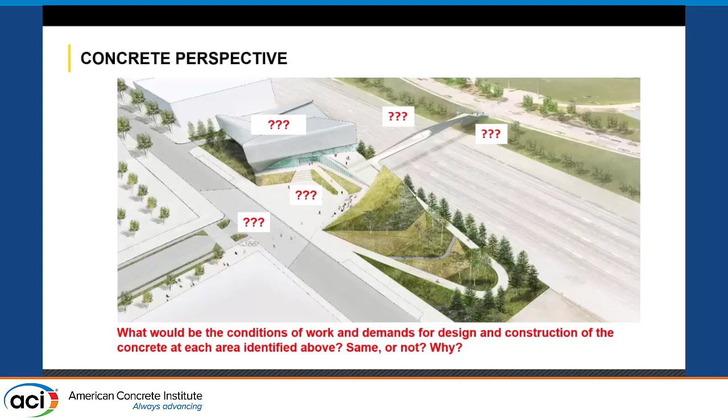That's extremely important for North America, because even in the USA we have 50 different ways at least to do something, since we have 50 states. And if you go through Mexico, USA, and Canada, there are different ways of doing concrete in each. That happens with standards too.

But what we commonly have is a challenge with specifications. What's the main challenge? People want to prescribe things because based on their experience, they believe certain requirements are needed, and they try to force the user to follow those requirements, because that's their belief, that's what the engineer believes needs to be done to achieve quality concrete.

But there's also another approach, looking more at performance. It's not about what I think needs to be done, but what are the conditions of work that person needs to understand to make the right selection of materials for that location. If you think about it, everybody agrees those are the two types of approaches you have around, right?

You can see, and you're going to see in a minute, that in the USA we take a look at different things than Mexico does. We took a look at things very different in Mexico and USA, and you also expect that.

One example I have here, I believe is very interesting, and I call it clear goals and undefined requirements. If you read it, everybody will understand those are very clear goals. We want that, right? But think about putting that in a spec. What are you going to do with that spec? Nothing, because you don't have a way to measure it.

There's no metrics. What is low permeability? What is low permeability to me is different than what is low permeability to you. What is dimensional stability and freedom from cracking? Is that a certain shrinkage value, or is that cracking? Because you're going to get cracking for many different reasons. So it's important to have clear goals but defined requirements.

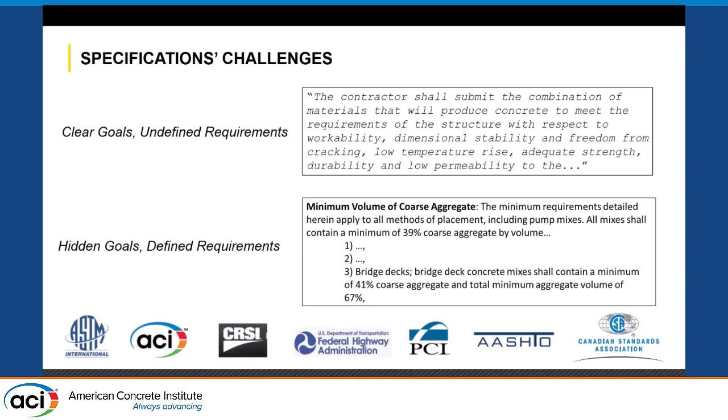Performance is all about what you need to do to build the work, and obviously make a performing service.

So the other fundamental part I want to mention is, what about smart requirements? You may be wondering where you saw that before in ACI, or where you learned this in engineering college. Well, you never learn this in engineering college when we were talking about science and engineering. But if you've been through corporate trainings on developing goals, the SMART approach to setting goals is a very important fundamental. Why? Because it's specific, measurable, achievable, relevant, and time-bound.

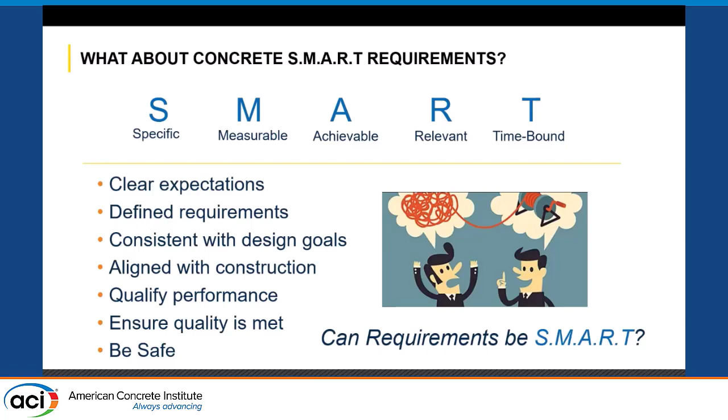That means there's a performance criteria you're going to meet, that you're able to measure, and able to start and finish. So the question is, why aren't our specs smart? If you want to be constructible and high quality, you need a spec that is specific, that you can measure, that can be achieved, that is relevant to the performance of the work, and that you're able to complete within a certain time. Pretty simple — a very easy concept to understand.

So then let's go to the technical side of things. We need to make sure concrete is strong, durable, workable, and economical.

My approach to economical is very different from what many people think economical means. It's not having a low unit price for your concrete — that's not what economics means. Because you can have a lower cost concrete that actually takes a lot of time to build and costs a lot of money to the contractor to get done, because it's not a good mix.

Now you can have a slightly more expensive concrete material that's actually easy to build, performs well, is constructible, achieves all the properties you want, and you don't have to revisit it again. So cost relates also to performance in construction, performance in design, and obviously there's a unit-price-related cost too.

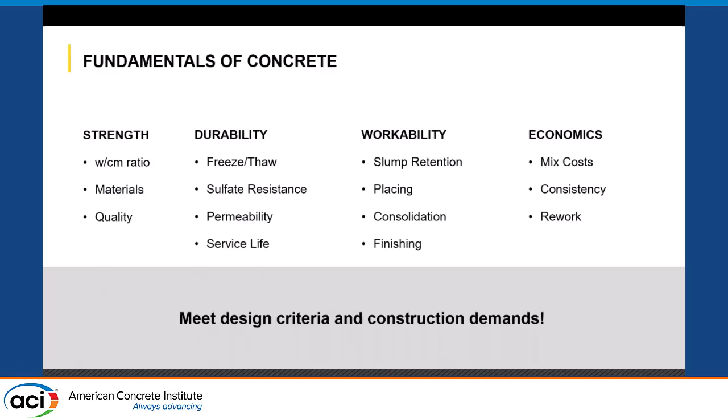Now let's start talking about North America. I started using snapshots of different standards to compare. I'm going to use the main concepts - everybody knows what slump is, like it or not. There are different reasons why we still do it, but there's not much technical rationale. Still, everybody finds it easy to understand, so I'm going to start with the slump.

Sorry, I'm going to start with mix design proportions instead. In ACI 301, it says concrete mixture proportion and characteristics indicate the proposed ranges of mixture proportion and changes in the materials. In the United States, we are required to provide mix design proportions - the actual formulation of your mixes is a requirement for construction, something very commonly done. But what I'm showing here is that in Mexico and Canada, that's not the case.

You start asking why, right? Think about how we do things, how much we love to prescribe things in the specifications, but the concrete producer is responsible for that formulation. The concrete producer is supposed to work with the contractor to find a mix that actually works for their own project. But still, you want to check it and make sure - if the mix has a little more water that you don't like, you need to tell that concrete producer.

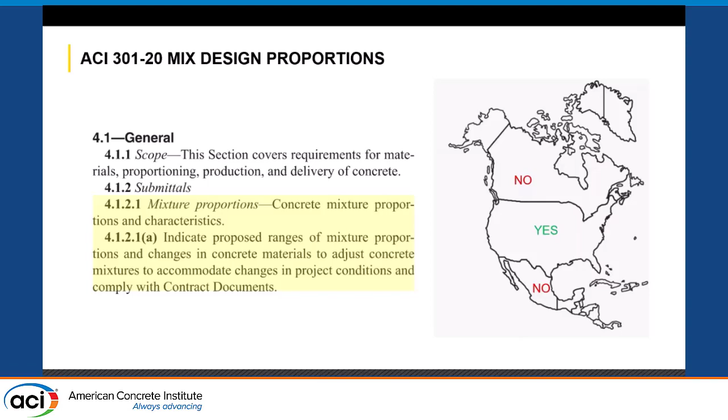Now we're going to talk about the slump. A similar conversation goes with the slump - what is a slump, why do you need slump, what does slump mean to the design performance in service? I'm showing you here some things to start thinking about, because if you think that 4-inch slump is the best concrete you can get, as many people think, I'm going to show you how that works for that type of rebar I have there.

It's easy to do research and talk about bridges in simple communities and municipal areas that don't have a lot of rebar, but think about rebar congestion - how are you going to build it right, consolidate it, have good quality, and avoid cracking with 4-inch slump? That's a problem we have in the industry in the United States. Sometimes the research isn't relevant to the standards, but we adopt it in the standards and keep moving, believing we have the right performance. That can be problematic.

So I show you here different levels of slump. All of them are good quality concrete, all of them have good durability. I'm going to ask you a question: which one do you think has higher strength or better durability in these three photos? I believe we have a lot of experts here, so I believe by looking at slump, you know which one is the right one.

He could be saying, what do you guys think? The SCC, he's saying - he's selling admixtures, so I cannot say anything there, you know what I mean? What do you think? Anybody else? Which one is better - better strength, better durability?

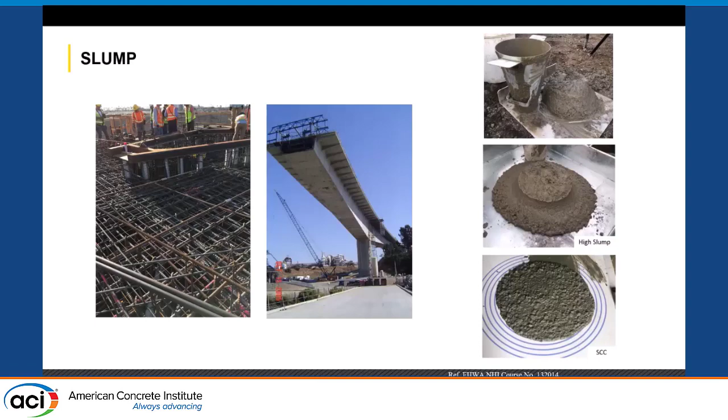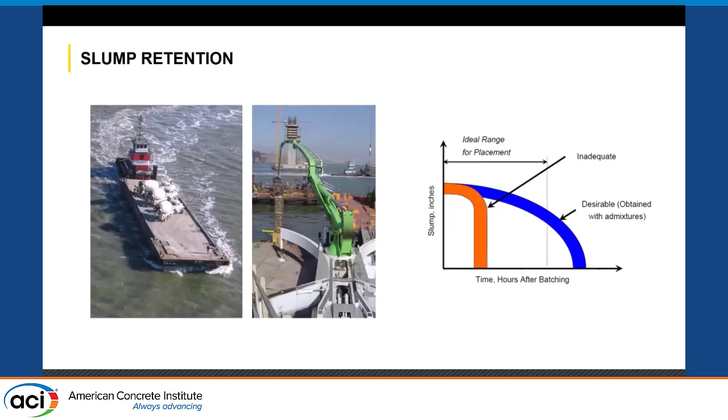So the other part about construction is, we keep talking about slump, but what does that mean? We have an operation that requires a certain slump retention. It's also about how you're going to build the work. You need a slump to construct it, but you also need to target a certain slump retention to build it, because construction demands vary. It's important to understand that.

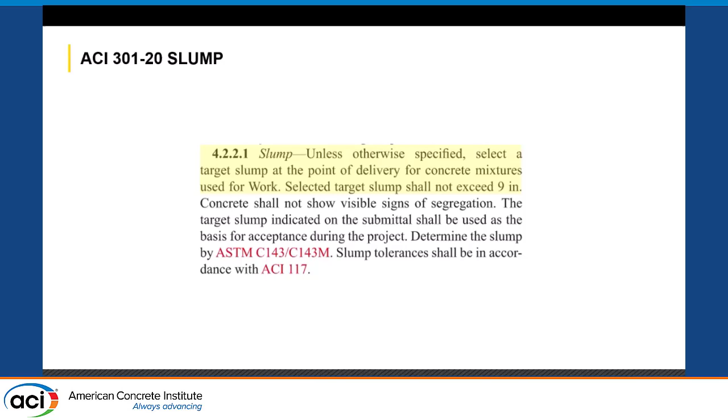So we got to the comparison of the standards. ACI 301 has modified their approach - they now state that target slump at the point of delivery needs to be specified, and the target slump shall not be greater than 9 inches. There's also another section for slump flow, so they allow that as well.

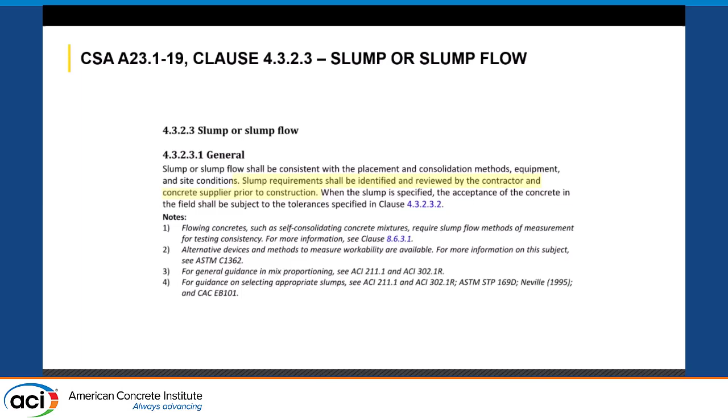In Canada, they state that slump requirements shall be identified and reviewed by the contractor and concrete supplier prior to construction. In Canada, the culture has the belief and trust that different parties have responsibilities to meet. If the concrete producer and contractor decide on a certain slump, they go with that slump - there's a culture built on that thought.

In Mexico, the standard talks about targeting a certain slump for purposes of water content, but after that you pretty much have admixtures to develop the target slump - similar to Canada, where the concrete producer and contractor have the freedom to establish a slump. However, in the U.S., we like to put a limit on everything - 4-inch or 6-inch, it doesn't matter what you're going to do, you need to deal with it. It's a challenge we need to work on.

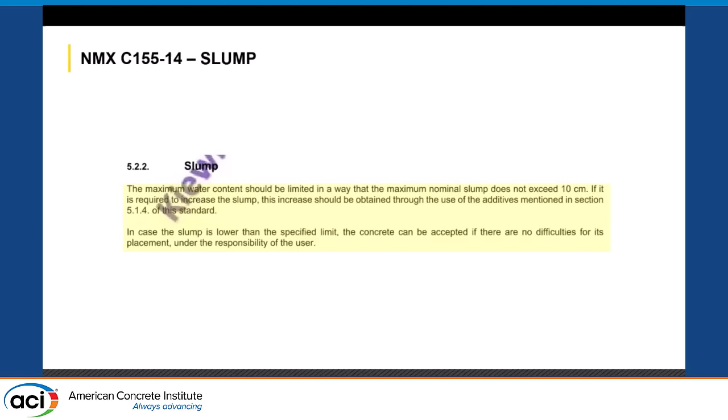Mass concrete - I'm going to talk about this because it's another topic where we have a lot of different opinions in ACI and CSA. Although the concepts are recognized in ACI, in CSA we've been able to move faster to adopt them and integrate better knowledge with practice.

It's important to recognize mass concrete - traditional mass concrete, think of it more like hydro dams, big work that doesn't have a lot of reinforcement and uses larger rocks. When you think about thermally controlled concrete, it's more the structural, isolated, large placements that occur in bridges or buildings.

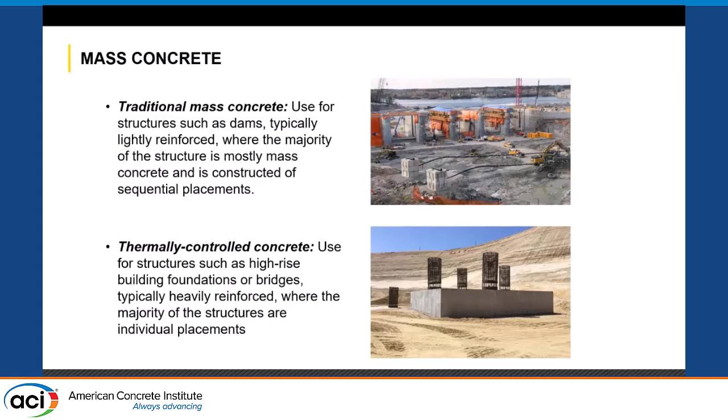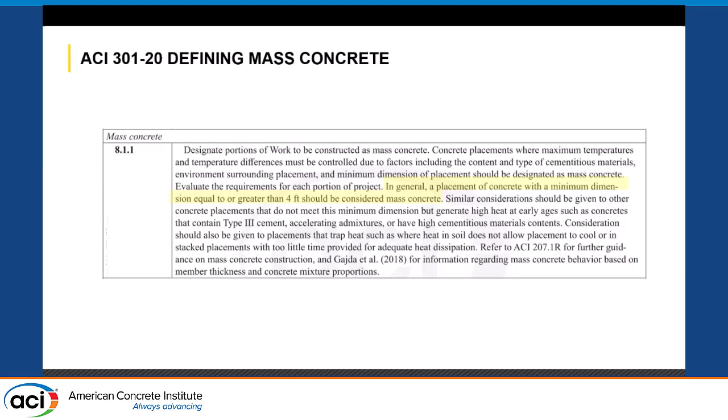For defining mass concrete, in ACI we recognize, in a non-mandatory section, that about 4 feet or greater you start getting into mass concrete. In CSA, it's about 1 meter, which is 3.28 feet. So between 3.28 and 4 feet, they're saying about the same numbers.

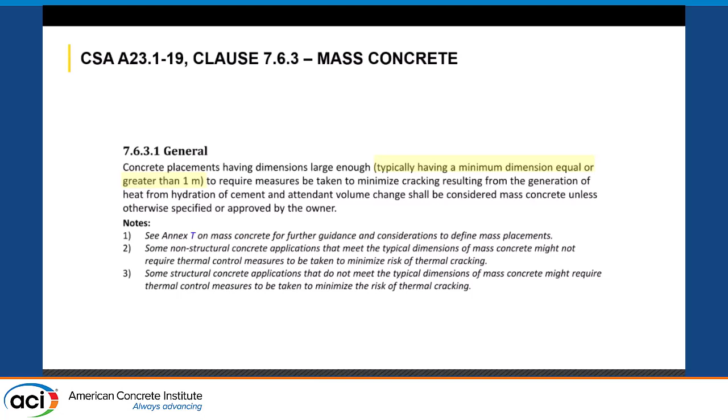Now in ACI we also have guidance for defining mass concrete which relates the type of mix to the size of the element - it's a correlation of how much heat we expect can be generated in a certain placement based on the amount of heat from the cementitious materials relative to the size of the section. So you're likely to be around the same target, 3 to 4 feet, which is in between Canada and the US for where you start to define mass concrete. It's not an easy number to define, but certainly somewhere there.

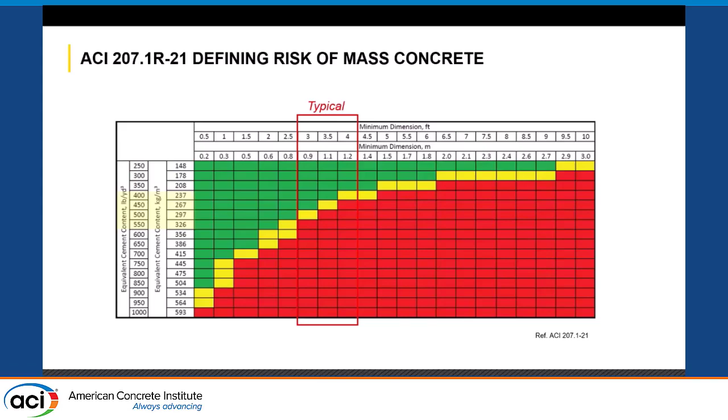And what we've been doing - we actually had a meeting about this today - in ACI we're not planning to change the temperature limits. We've been going over the last two cycles in ACI discussing the concepts we implemented in CSA in Canada.

We have decided to not make a change on that. We continue to have 160 and 35 degree differential, so 160 in this case is the maximum temperature.

However, it's recognizing the approach that we took in Canada, which is using supplementary cementitious materials to optimize the temperature profiles you can get and make sure you manage thermal controls. In CSA, we have a different approach, which actually recognizes what we already have in ACI as a guidance, but now we recognize it as part of the standard.

We're pretty much saying, if you don't have any mitigation with supplementary cementitious materials, you do not exceed 70 degrees. However, if you have an improved system with cementitious materials at certain levels, as you increase them through different levels, you get an allowance of 75 degrees up to 85 degrees.

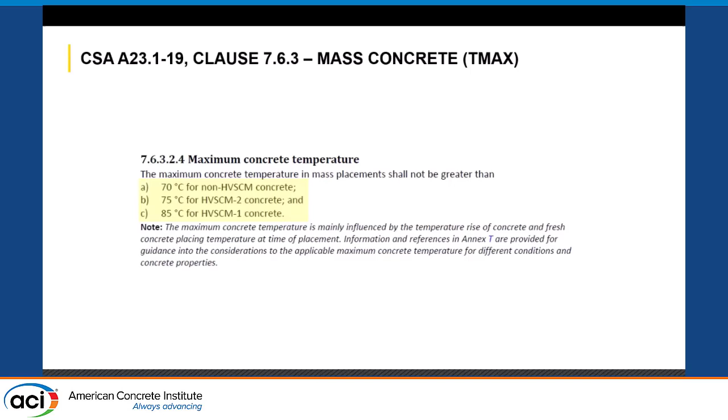So pretty much you can actually have a determination of performance. What is the type of application you have? What is the size of the element? You may have a large size element that needs more powder, and you can tolerate more heat because you improve the chemistry of that cementitious combination.

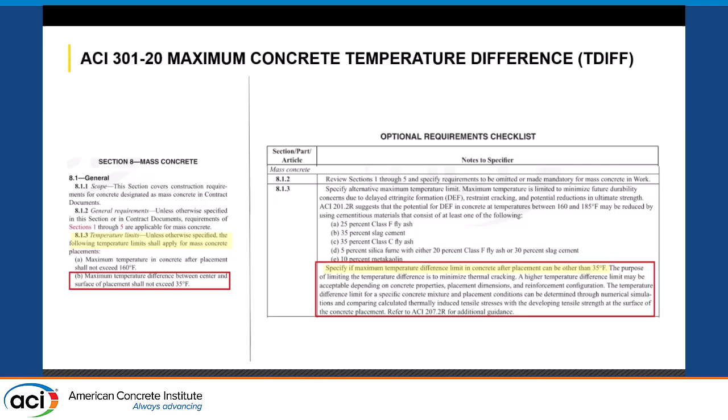Then you have the same concept for differential. 35 is a fixed limit. We have it in the US, in ACI. We also recognize in the paragraph below that you can use a design approach to calibrate a performance-based temperature differential. However, when you go to Canada, we already adopted the concepts of performance, and they're part of the standard.

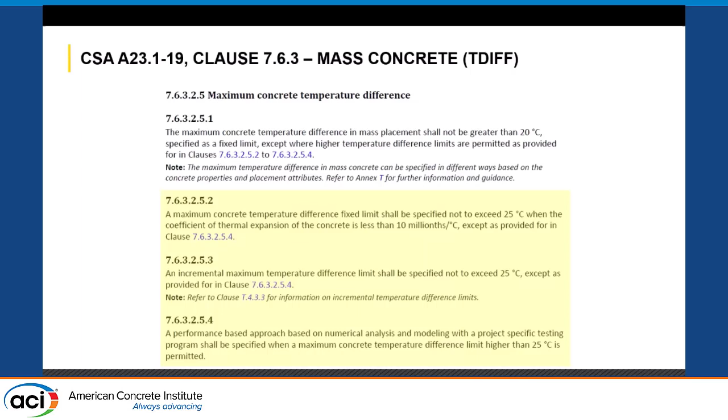So on top you have the differential of 20 degrees Celsius, which is 35 degrees Fahrenheit, and those are established in ACI as the default standard. However, we directly now recognize in Canada that you have different ways of doing this. By recognizing the development of concrete properties and qualifying them, you can actually have higher temperature differential.

How does that look? When you look at the fixed limit, that's a concept from traditional standards. Traditional 35 degree, even if you go to higher temperature limits, it's just fixed. It doesn't recognize performance, it doesn't recognize that concrete gets better with time, that your strength is going to be better at 7 days, 14 days, and 28 days. By looking at performance, you can create an approach that recognizes the ability of the concrete to improve, and that's what you're doing with the concepts implementing performance.

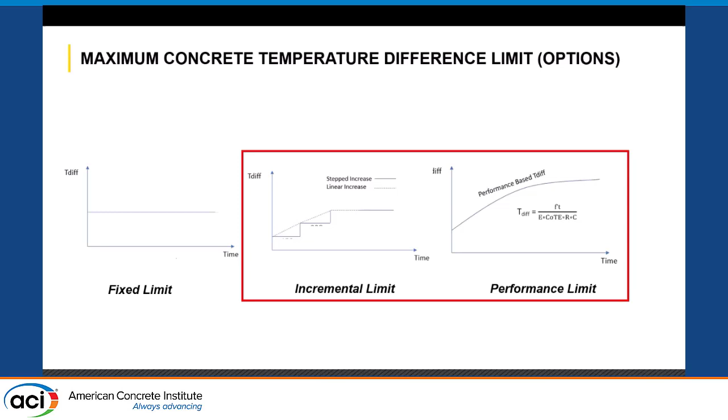These are qualified, calibrated with analysis and testing, and you're able to determine something like this. If you look at an example, directly compared to an ACI limit of 35 degrees, you can see where it is in this case. You see the opportunity we're losing and the inefficiencies we have in construction by just limiting a number, because all of a sudden you look at the 35, and it doesn't change with time.

But then look at the curve on top, and that's the mix. You have a mix with a very good tolerance to tensile strains from heat, from the differential of heat gain and loss of heat. So you get thermal strain occurring, but the mix is actually generating enough tensile strength to tolerate those tensile strains. So you're increasing the capacity of that mix with time, and now you can tolerate a higher temperature differential as the concrete gets stronger.

What happens with that? You can build concrete faster, you can be more efficient, you can avoid a lot of the cooling that occurs which actually takes a lot of energy too, and be able to produce a high quality product without having to be constrained by prescriptive numbers. Because these are prescriptive numbers, they don't even have a technical basis for it.

So that's the concept we implemented in Canada. As you can see, a very good opportunity for improving performance of work. In Canada we do it. In USA we talk about it. We don't want to make a decision about it. We are afraid of it. Don't know why, but we continue to be afraid of understanding concrete.

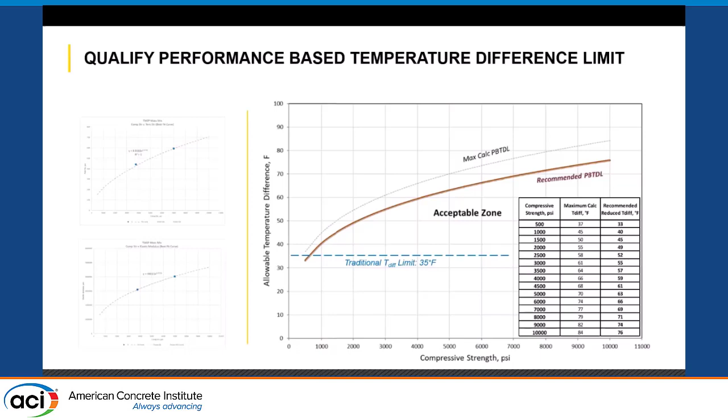And then the next one is durability. So when we talk about durability, durability is actually important for concrete. You can imagine that there's nothing better than to make concrete sustainable, to be durable.

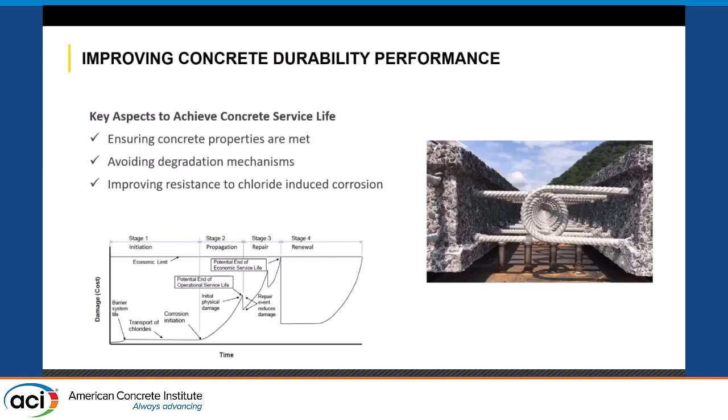And I always say, what is the most important part of concrete to be durable? It needs to be workable. Because if you cannot place it, finish it, and consolidate it, then you cannot do anything in the field. It can be good in the lab, but you cannot do it in the field, right? So meeting the concrete properties is important, avoiding degradation mechanisms, and improving resistance to corrosion.

Okay, so let's talk a little bit about that. What are the concepts that we typically have available? Think about a concept we have available to make those decisions. You can provide better cover, you can provide better concrete, you can improve the rebar, and you can limit the ability of anything to get into that concrete, with coatings, surface treatments.

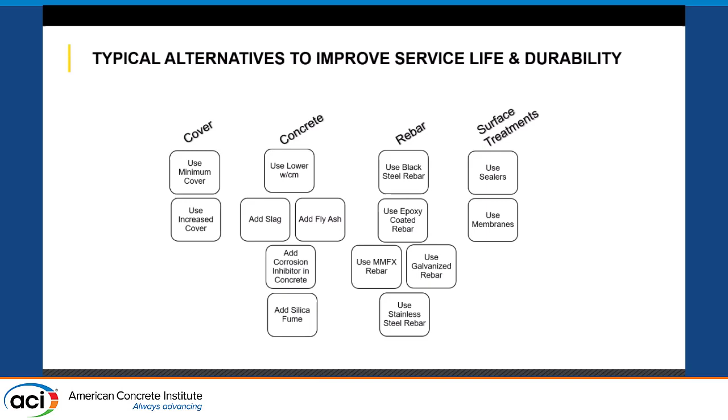If you look at the first part, cover, it's well addressed in pretty much every code, every requirement. You need to have a certain cover. And then you have water-cement ratio. All the other parts that you see there, if you look at ACI codes, it's not addressed. All you say is that to be in C2, which I'm going to show in a minute, when you're in C2, you need to have a maximum water-cement ratio and a minimum strength. And all of a sudden, that's it.

That's the solution to make concrete durable. Do you see anything else there? Do you see any performance criteria testing? Do you see any correlation of performance with materials that can improve that material property of durability? There's nothing. This is the current ACI 318 standard requirements. Nothing. So if somebody tells you ever that you have good quality concrete in the bridge because they meet the code, good luck. Get out of that bridge.

Honestly. But now look at how Canada and Mexico are doing things different. These are our neighbors, right? So North America, our neighbors. So the first thing, and I'm not going to get too much in the details because I know Doug is going to get into all the details, but we have all these different classifications of exposures.

And I'm going to focus on just these two. When you see those two, and you want to think about what C2 was in 318, but put a little bit more levels of effort and requirements to understand performance. Well, that's what Canada did. Canada pretty much took these minimum requirements and just used a performance criteria to supplement the ability to have better durability and performance in service.

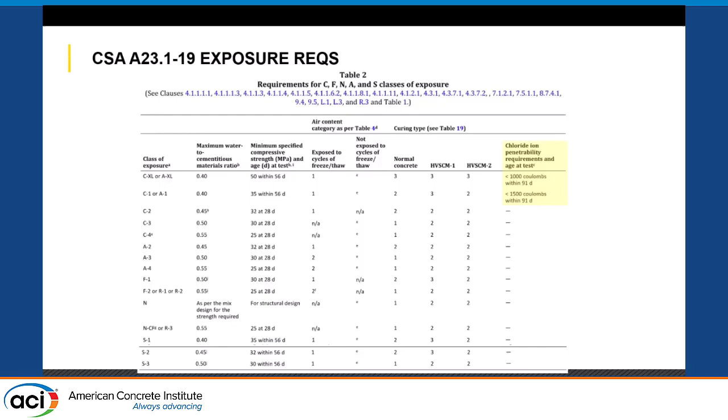Now we have also in Mexico different series of requirements, and these are just a classification of exposures. We have 3 pages of classification of exposures in Mexico. And I know everybody has seen the 318 in Spanish and 318 in English. It's always longer in Spanish. I guarantee you that. I cannot guarantee you what's going to happen, but the 318 in Spanish is always going to be longer.

And that's why I don't write anything else in Spanish. I do it in English. Don't ask me to write in Spanish. It's going to be a long report. But anyhow, this is in English, but it's just the culture. We like to explain things. We have a lot of passion and energy, but we like to explain things. We like to say things 3 times to see which one you laugh. And you laugh at one, that's good, he got it. The other 2, he didn't get them.

But anyway, the point here is look at this. I love this table, by the way. And we're doing a lot of work in Mexico, and I'm glad that they're doing what they're doing. It's a very well thought table. They got from erosion resistant to sulfate resistant to all other durability mechanisms. And you see that yellow line that I have there? There's a permeability criteria associated to these environments that are for severe exposures.

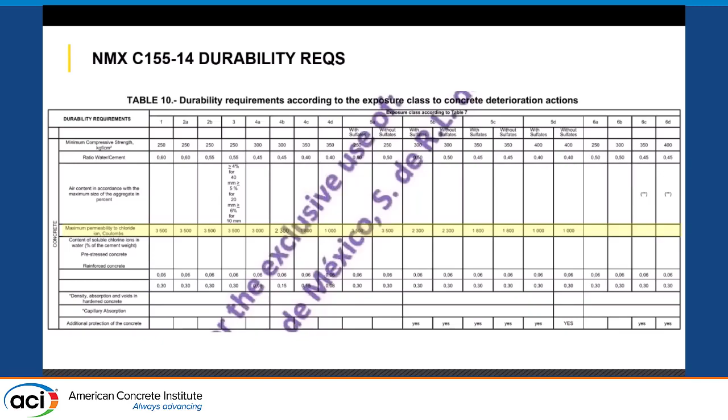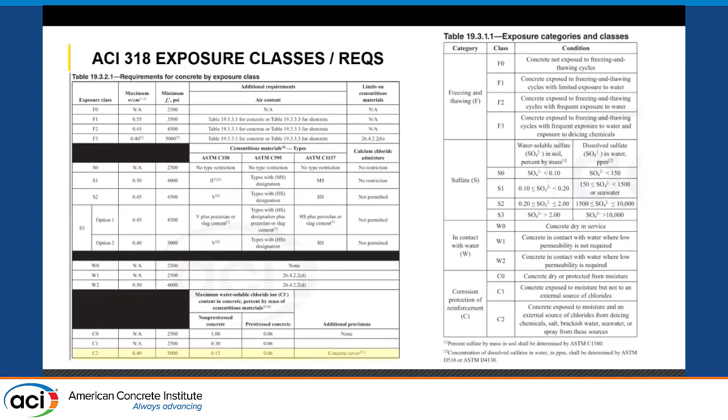We go back, guys, we go back. We go back to 318. We look at what we got here. It's a bare minimum. We just say with water-cement ratio, we make the world better. But Canada and Mexico are doing performance testing for this. So this is extremely important lesson learned here. We need to start thinking a little bit more about durability and performance. We're working on a code.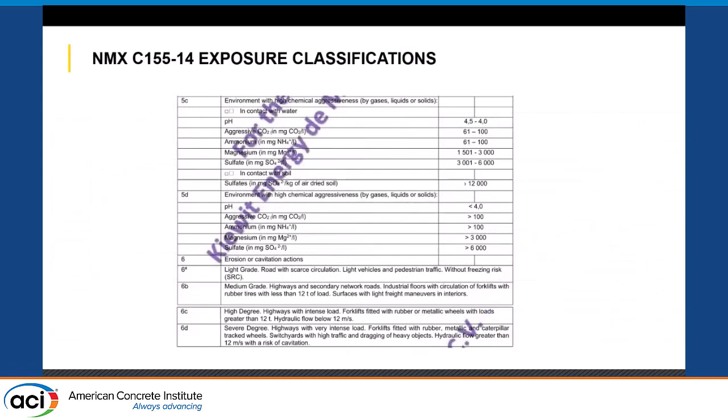All that is going on the works. But as you start thinking about why we're doing all the efforts we're doing with developing codes and developing standards, this is extremely important for the U.S. So then I'm closing here. I have a couple more slides closing. But this is something extremely important.

These are projects that we have done, and this is more of a mindset. I started with the perspective of concrete, this mindset. This is the first project I'm showing here. There's two projects actually: the Inglewood Stadium, and the bottom one is Fast Fix 8. Those are accelerated fast track projects we did. Extremely successful projects, and these two are emergency projects.

Everybody remember Katrina, the fatal event in the United States? We reconstructed all the levees and all the emergency structures for New Orleans. And then we also did the emergency project on the spillway at Oroville Dam. When the dam collapsed and the spillway collapsed, we went there and did the work.

I'm going to tell you there's one trait, just one, that is common in those four projects: commitment to excellence. Because there's no chance for failure.

We don't have years to build something. We don't have the ability to take a 4-week review process. Everybody from the design, the owner, the contractor, the producers had one goal: you need to get it done, I need to get it right.

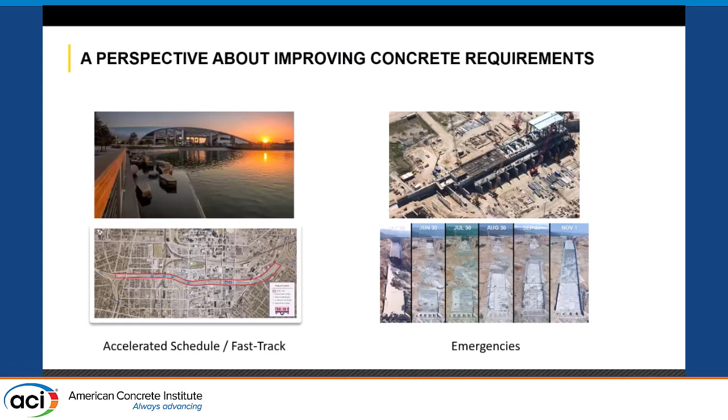But when we are not on an accelerated schedule, when we're not in an emergency, all of a sudden we become dumb and lazy. But if we put our thoughts into it and work on commitment to excellence, like we do when we're under pressure, all of a sudden we are amazing. So when you look at the problems we have in the industry for standardization, it's not ACI, it's not the US, it's not Mexico - it's us as people that are not willing to actually commit to achieving excellence.

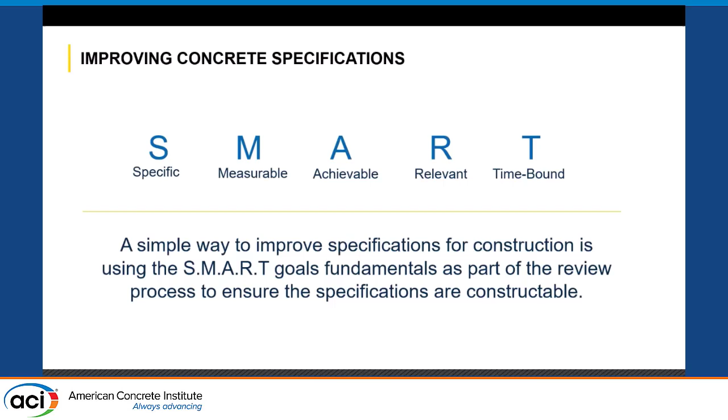Basic things like SMART - we all learn these in management, we all learn these in the basics of setting a goal. We go to develop a spec, we don't know where to start. This is all basic stuff: specific, measurable, achievable, relevant, time-bound. That's going to get you to be constructible and be high quality.

And then pretty much, just to sum it up, we need to have requirements that are technically sound, relevant to work, specific, aligned with demands of the work, achievable, executable, performance-driven, because we need to make sure we perform, and flexible to fit different purposes - there's no one-size-fits-all.

So because the left side here has a solution and the right side has a different solution, doesn't mean one is right or wrong - just different solutions. Hopefully you understand the goal of my presentation today: we're sharing the approach to the different standards in North America. We have a couple of minutes here, I think, to ask some questions.

The materials - you're saying like the cementitious material, the manufacturing of cements, for example? So I avoided getting into that discussion. I believe Doug is going to get a little bit more into that on the Canadian side. But I can tell you this from experience: the recognition of different types of cements, going from performance to blended to hydraulic cements, between Canada, Mexico and the U.S. - Canada and Mexico adopt cementitious materials that are different than just traditional general use cement much faster than we do in the United States.

We're struggling right now with Portland limestone cements. They have been having that for a long time. And if you look at the type of cements they have - sulfate resistance, blended with slag, blended with fly ash - they use them everywhere without problems. When you try to bring one of those to any of your local communities in the United States, you spend months and months and months adopting. So we have an issue.